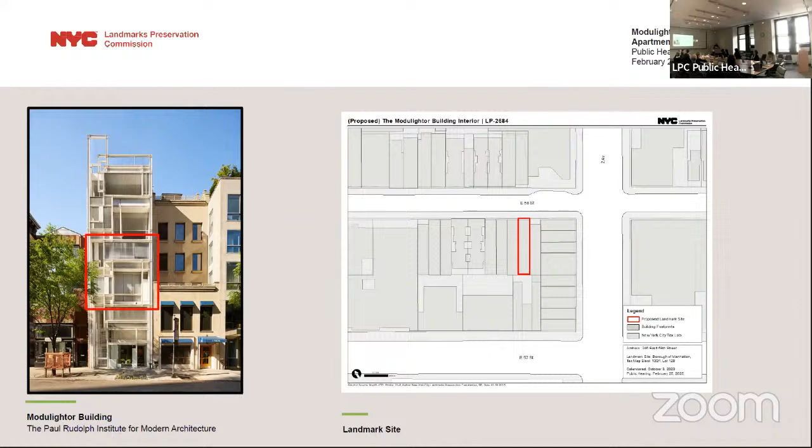The Modulightor Building's apartment duplex is an important late 20th century modern interior by the American architect Paul Rudolph. Located in Midtown Manhattan on the south side of East 58th Street near 3rd Avenue, the apartment duplex occupies the 3rd and 4th floor of the building, which was designated an individual landmark in 2023. The proposed interior landmark includes the entire 3rd and 4th floors, outlined in red, including the entrance hall, the north and south living rooms, 4 bedrooms, balconies, kitchen, and bathrooms.

The Modulightor Building was constructed in phases, starting in 1993. Planned as twin rental apartments, the apartment duplex received a temporary certificate of occupancy in June 1994. These units were first leased to tenants in 1996. Following Rudolph's death in 1997 and the settling of his estate in 2001, his partner, Ernst Wagner, moved into the building, removing a wall to combine the north and south units into a single apartment that also functioned as headquarters of the newly established Paul Rudolph Foundation. Following a 'disagreement over the group's priorities,' he founded the Paul Rudolph Heritage Foundation in 2014, which changed its name to the Paul Rudolph Institute for Modern Architecture in 2022.

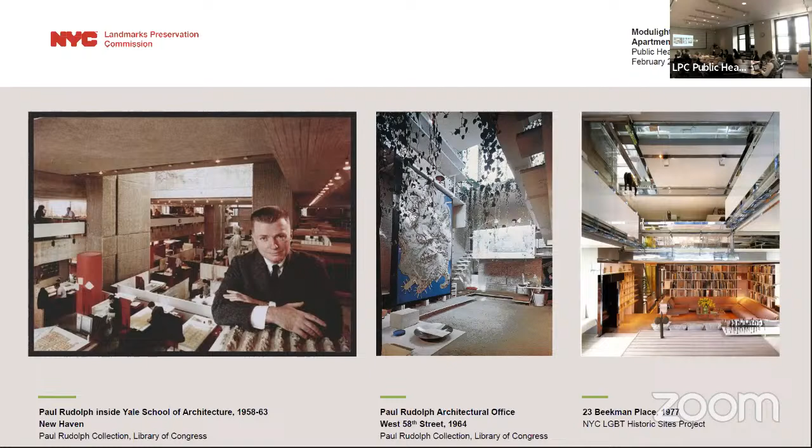The all-white apartment duplex has a fragmented open plan divided by partial walls and partitions. Significant architectural features include the tile floors, 2 staircases, exposed metalwork, fireplaces, lighting fixtures, and built-in furniture.

In a 2004 article titled 'An Architect's Last Word,' architect Joseph Giovannini wrote in the New York Times, 'Inside and out, the triumph of the design is that Rudolph pulled off the kaleidoscopic complexity with wallboard and off-the-rack metal studs and joists. For Rudolph, the richness of the materials didn't matter. He aimed at the same spatial qualities regardless of materials. It was space itself, Rudolphian space, that counted.'

Traversed by floating open stairs that rise and turn, as well as cantilevered balconies and landings that project over the lower floor, New York Times critic Jason Farago wrote in 2018 that these elegant interlocking spaces provide a corrective to the view of Rudolph as a brutalist heavyweight.

A highly significant late work by Paul Rudolph, the Modulightor Building Apartment Duplex is home to the Paul Rudolph Institute for Modern Architecture. Open to the public by appointment and through regularly scheduled open houses, this extraordinary space is the only publicly accessible interior by the architect in New York City.

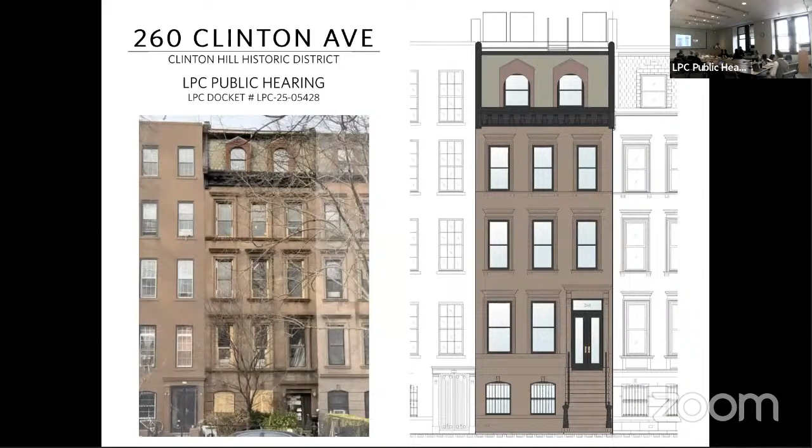They are owned by St. Joseph's College, so they're institutionally owned. These are all the tax lot photos of the subject building and its neighbors, showing the original state of the buildings with curved entrance doors and pediments, full height first floor windows, and wide stoops with substantial balusters and newel posts.

I would like to note that on all of these, the pediment originally crossed the lot lines between the neighbors. This also illustrates the original steps up from the sidewalk, which has been changed as evidenced on the next 2 slides. It's very important to our presentation that the areas here were raised originally, and you'll see that they are all lowered now to grade. So that's very important to what we are presenting.

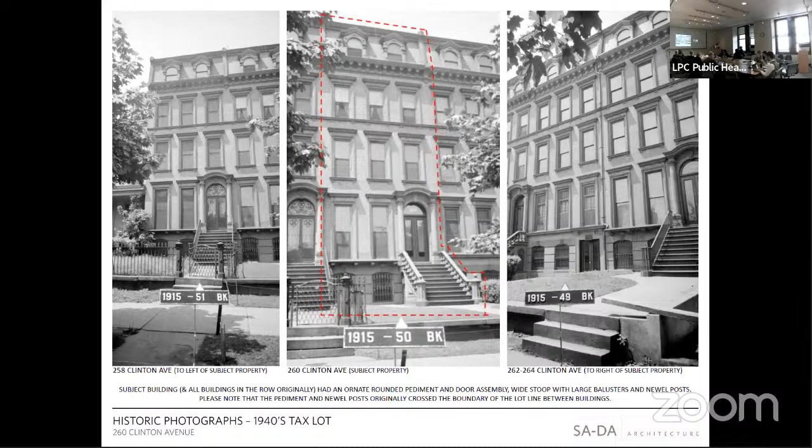Zooming in on these 4 buildings and their current state, the stoops have all been removed and the facades have markedly changed. The changes to the middle 2 buildings are centered on the first floor and below, while the building at the left has been substantially altered, and the one at the far right has also been altered with an Art Deco entrance.

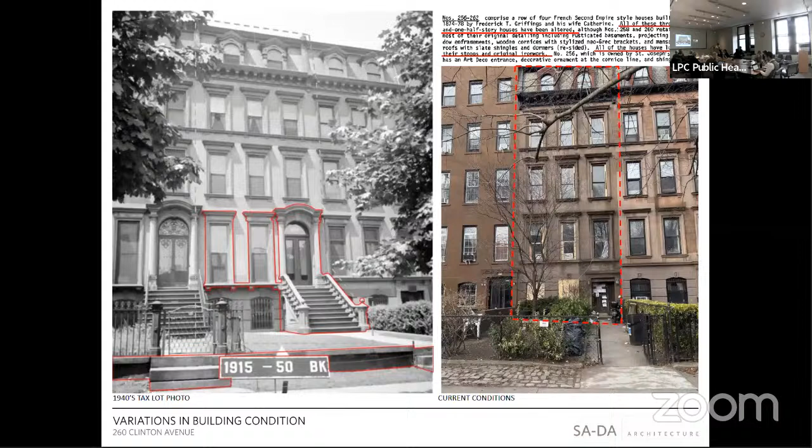Zooming in farther to focus on the changes in our specific building: the removed stoop and railings, the removed entry door and pediment surround, the first floor windows that had been raised previously, and the grade that had been lowered so there's much less grade now. What remains is a building that is very simplified and more rectilinear than what existed previously.

A 2D elevational drawing of the existing conditions, and a 2D elevation drawing showing our proposed design. We believe our proposed altered version is a more appropriate recreation than an exact replica of the original stoop and door location.

First, the grade has been lowered, which would mean the stoop would have to be significantly taller than the original stoop, which we believe would cause it to be out of scale if we were to replicate the original. An exact recreation of the stoop would be impossible for the pediment because the original one crossed the lot line, and we can't do that today. Any recreation would have to be cut off or altered in a way that would negatively affect its appearance.

Most of the curvilinear aspects of the original facade are now gone. We believe a more rectilinear approach fits better with the current row as they exist today. Likewise, as much of the original detail has been removed from these and the surrounding buildings, we believe a simplified yet still ornate building railing would be more appropriate at this stage than the altered version of the original design.

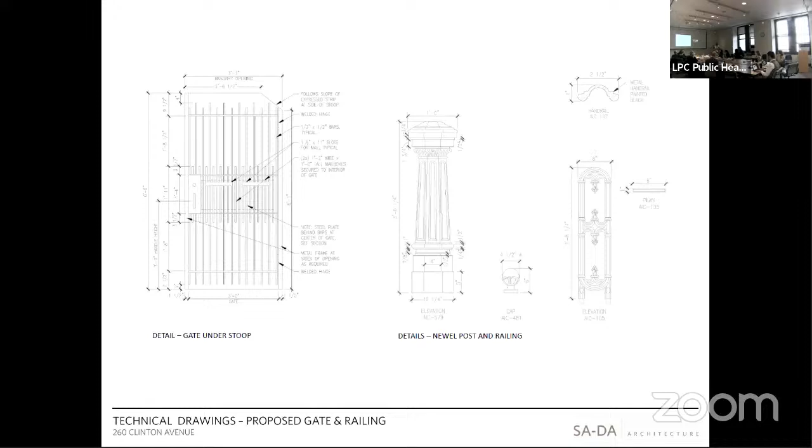Technical drawings of the newel post, railing, balusters, and understoop gate. Technical drawings of the proposed door, surround, and pediment.

Precedent: we have 4 precedents. The first precedent is within our historic district, though quite far from it. As you can see, it's on the lower right as opposed to our building on the upper left. This focuses on the door surround and the pediment.

The rectilinear nature of the door surround is what we are pointing out here. The railing is also similar to what we are proposing within the same historic district.

Precedent number 2 is also rather far away, but within the same historic district, as opposed to ours. In this example, we are focusing on the railing and newel post, where you can see that the detailing and the newel post are very similar to what we are proposing.

Precedent number 3 is not in our historic district, but it is closer - it's in Fort Greene, next to Fort Greene Park, right there on Washington Park. We are focusing on the railing and the newel post. This is a blow up of it.

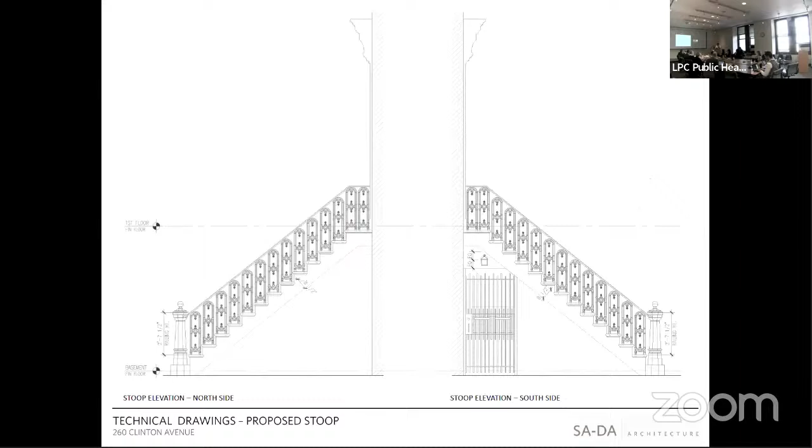I can go back to that slide if you prefer. Sorry. It looks pretty similar, right? You don't have much space between the doors with that.

But I can tell you that this newel post, as it curved at the bottom, did go over the property line. I'm fairly certain. It's hard to tell, but I'm fairly certain of that. It's very much more grand than what we are proposing. I do know that, but I think it would even be more grand given the additional 3 risers that we would need.

Okay, and I'm sorry if I missed this, I just wanted to catch your explanation because the biggest alteration is the flat arch at the entry as opposed to the historic arch, the round one. And what was your reasoning behind that?

Our reasoning, I wouldn't call it - I would just call it a design reasoning, let's call it that - because I believe if we were to do a large rounded opening, a rounded pediment, it would stand out even more on this row, and the row has been rectified. I mean, there is no more rounded anywhere.

And I'm concerned, honestly, that since the right two buildings are in institutional hands and the left building is not going to change anytime soon, we're not trying to set a precedent for these buildings on the right and left to follow. I mean, ideally, yes, but most likely it's not going to be a precedent. I don't want this to stand out too much. I don't want this to look out of place.

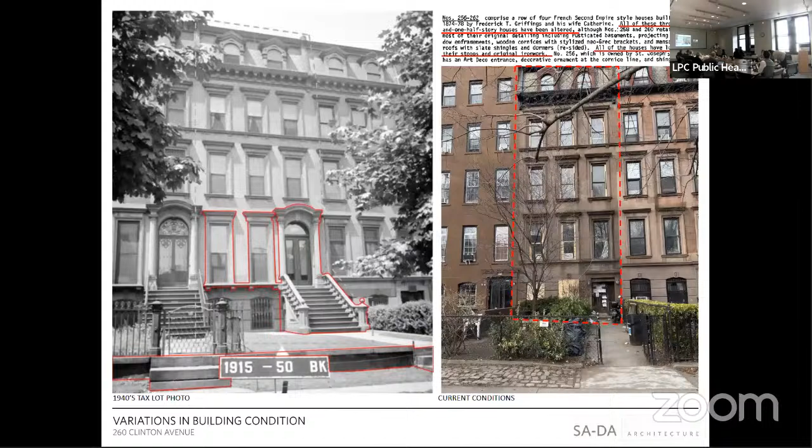So you've got a wood frame building right here, our building is right there. You've got a wood frame, you've got a Queen Anne, and I don't believe there are any more brownstones. They're all different on this side. This side is Dillon Children's Center, and then there's an incredibly beautiful big one-family on the side, and then St. Joseph's Library. So it's very different. And the other side are all the old Pratt buildings, the big mansions.

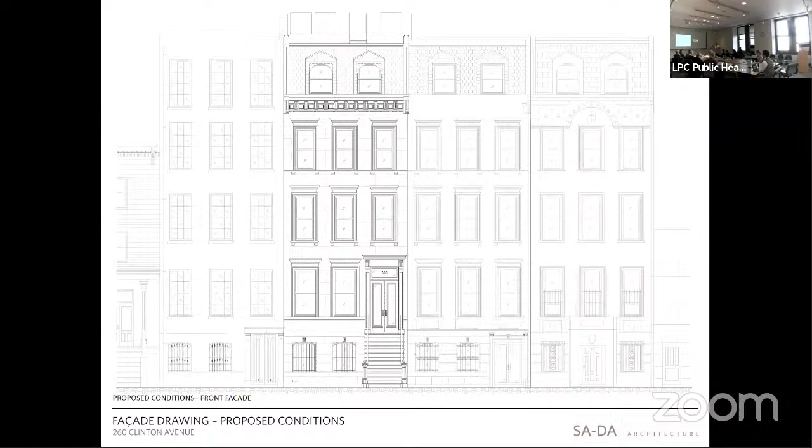It's a very good question. I don't know if I have that information, but obviously, we don't know actually when they were built. I would say they were all built in the same era. Okay, I can't tell you exactly. Right, they would be late 19th century, so within that sort of period, the lighter handrails, or something that came later. Well, that's the intervention, the alteration that we are proposing, is the lighter handrails as the main issue. But these handrails are original to this type of building. To those buildings, it's original, yeah.

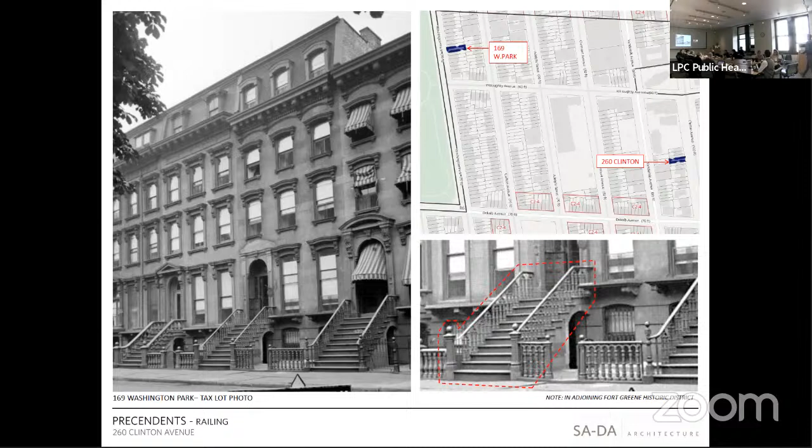Hi, can you hear me? Yes, we can hear you. My name is Rosaria Sinisi, and I represent Citizens for Responsible Neighborhood Planning of Clinton Hill and Fort Greene, which is involved in historic preservation matters in both districts.

We are always happy to see the restoration of original stoops, and this revised proposal improves on the ones submitted originally to Community Board 2's Land Use Committee. However, we feel there is room for further improvement in two areas. The proposal shows a much narrower stoop than that shown in the original tax photo. While we understand the lot line issues, the new stoop handrails proposed terminate into pilasters on each side of the door at its top.

But the photos offered as comparables, which are also for the most part French Second Empire, show those handrails terminating outside the pilaster elements that support their respective stoop pediments. If the new stoop must lose the dramatic width and flare of the original, adding a few inches to the stoop width and moving these handrails outwards so that they terminate outside the proposed pilasters, as shown in the comparables offered, would give a visual impression of a wider stoop without crossing the property line necessarily, particularly with an altered arch pediment at the top and possibly at the bottom of the stoop, where in most properties similar to these, it's only the bottom stair, the bottom brownstone stair, that actually turns slightly across the property line for a couple of inches. And you see that as a standard all the way up and down brownstone blocks.

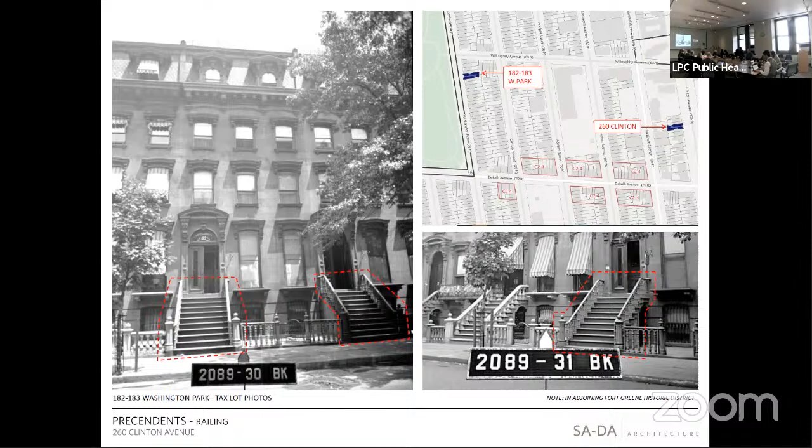I think what she was suggesting is that the railing be pushed to the other side of the pilaster without widening the steps, so that it's just to the outside edge of the steps. It would change how the railing meets the newel post. Okay.

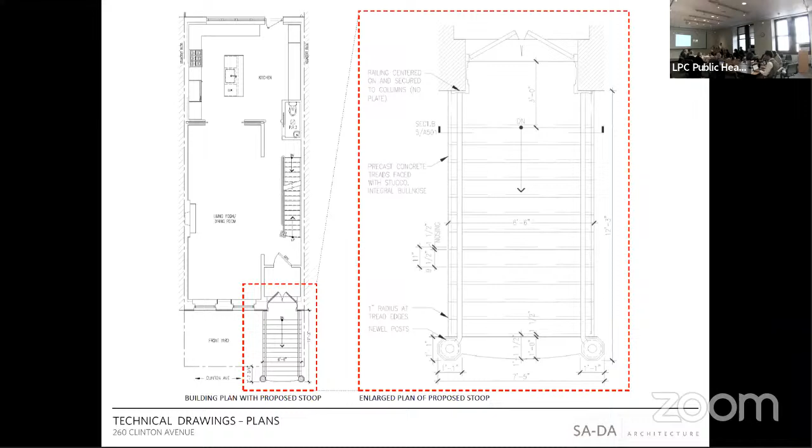This is a row of 4 buildings in a very eclectic block with a lot of diverse building types. Each of the four buildings has been altered significantly with the removal of their stoops and the removal of some level of ornament. This proposal is to restore a stoop, and the grade has been lowered at the front areaways. Proposal is for a new stoop that would address the height change, the change in grade, and a new door with a new door surround. And it looks toward more transitional details to fit within the current context.

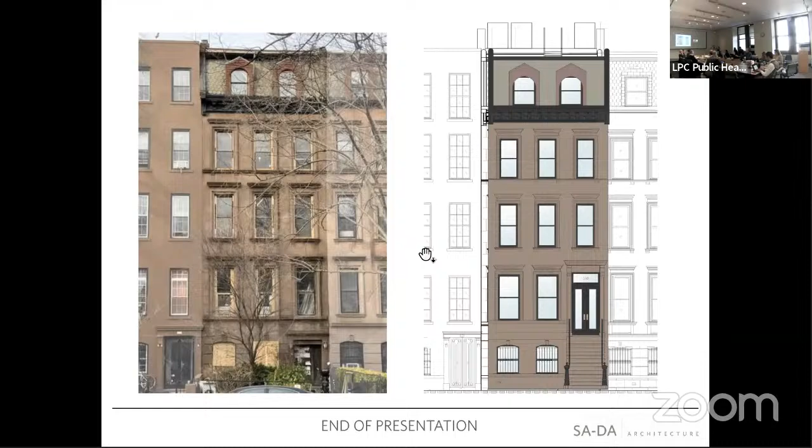All right, that's approved, and please continue to work with the staff on those details. We'll move to the next item.

Okay, I'm going to note a schedule change. We're going to read into the record the next item, item number 2, LPC 25-07011, 348 MacDonough Street in the Stuyvesant Heights Historic District, not to be presented today. We'll read it into the record to be presented at a future hearing date.

That will take us to public hearing item number 3, LPC 25-04579, an application for a certificate of appropriateness in the Borough of Brooklyn, block 1074, lot 40, 186 8th Avenue in the Park Slope Historic District. This is a French Renaissance style row house built in 1897 to 98. The application is to construct a rear yard addition.

Wait, you can say that.

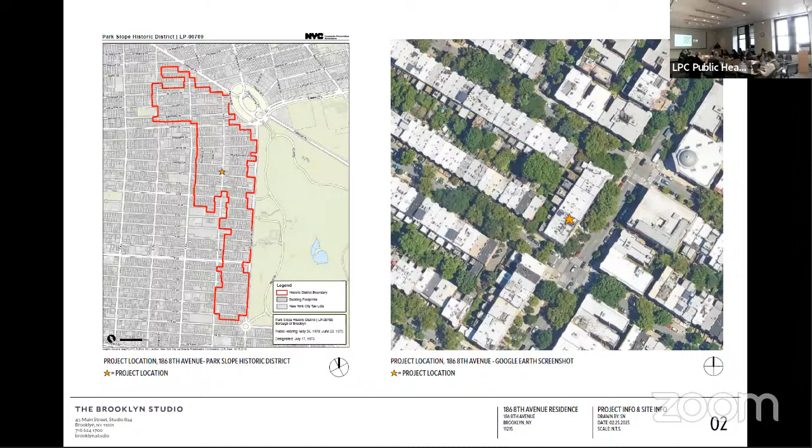This is the gist of the application. The drawing on the left is the existing condition, the drawing on the right is the proposed alteration. This row of three houses, the one on the corner of the block is right there on the right side. That building has had multiple additions over the years. It started out taller in its extension, then got converted to an apartment building at some point, so it got fully filled out. The house directly to the right of our project, we believe, got a first floor rear yard extension around 2020. Our proposal is to add a two-story rear yard extension in the same space.

This is a little axonometric describing the existing condition. The red building to the left is one of a row of, I think, four of pretty much identical configuration, with large rear yard extensions, larger than what's existing in our three buildings. You can really see the funny accretions that have occurred to our row, the corner building being the most involved. You can see the corner building was initially 3 stories tall with a 2-story portion, and then the third story was eventually filled in, we think around the late 1930s.

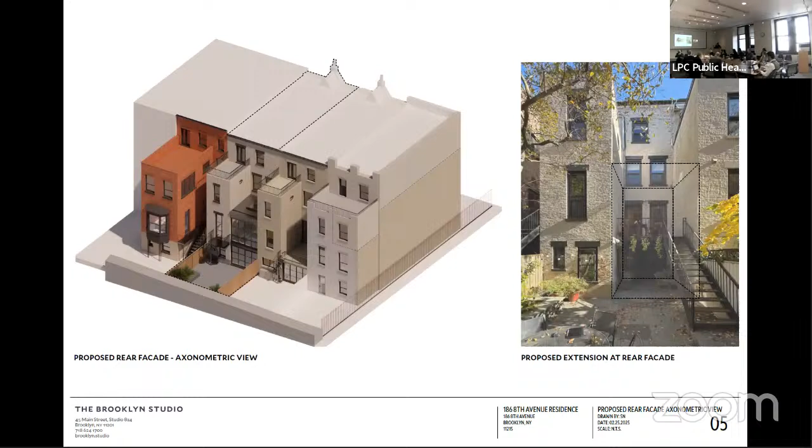There's high visibility here from First Street. Again, you can see our building is the white one, 3 over. You can tell which one it is because it's next to the red brick extension. You can see there is visibility of the second floor extension. There it is.

And there's the rendering of the proposed extension. We've designed it to be set back 8 inches from the masonry facade, so that it's clearly subservient. It's a wood and glass extension with an iron rail, really rather simple, meant to allow the original form of the building to continue to read.

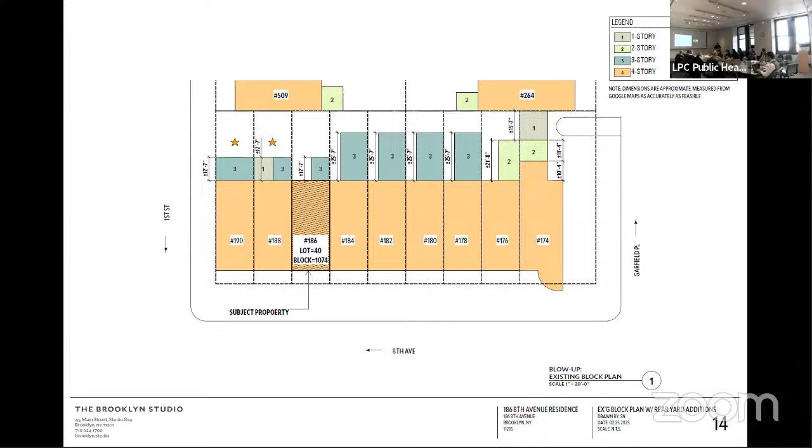Before and after, 2-story. Existing plans, proposed plans.

This is our color study of the extension. The buildings are all painted white brick, they appear to have always been painted white brick, and we are not changing any of that. We are just filling in our two-story extension with our wood and glass structure, and then a steel spiral stair down to the backyard. The house already has its lintels and sills painted black, so we're continuing that detail in this facade.

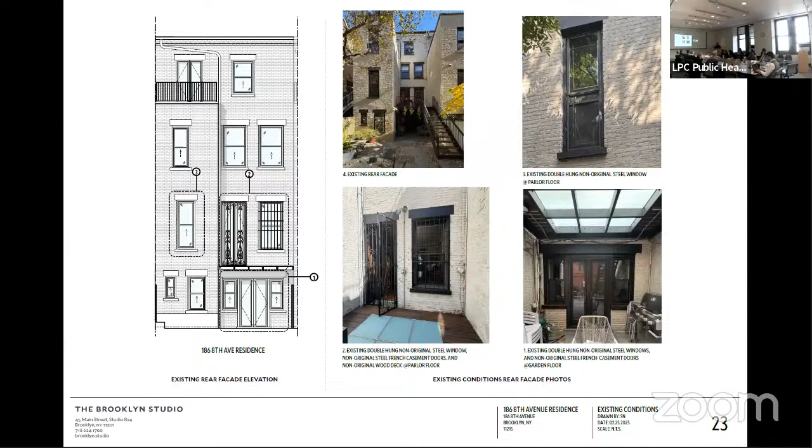Existing, proposed. Just some existing condition photos of what's going on. There's a deck there currently. Plans.

Existing, proposed, I think that's it, right? One more. Oh, that's the final image. So that's it. All right, great. Thank you. Okay, any questions, commissioners?

Yes, Commissioner Chu. So the addition, you said it's wood and glass? Well, the door system is wood, and then the frieze and fascia and the panels are wood, and then there's a steel handrail and a little spiral stair down to the garden.

Okay. And it's hard to tell from the drawings, but the detail of the roof eave has some kind of profile to it. Yeah. So it's like it has a section. What's that? Yeah.

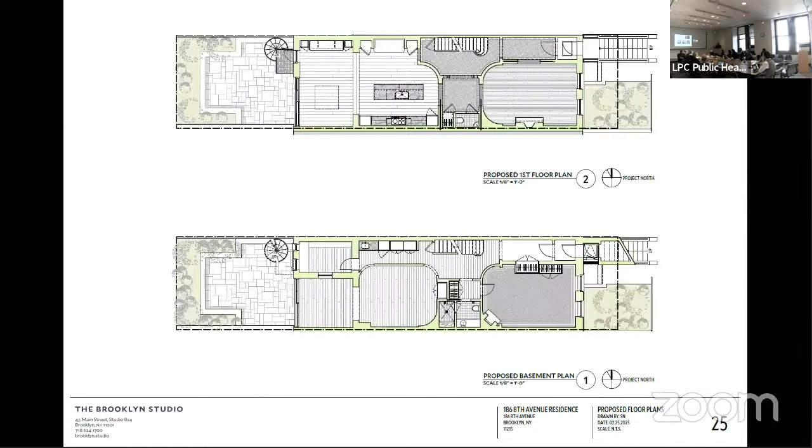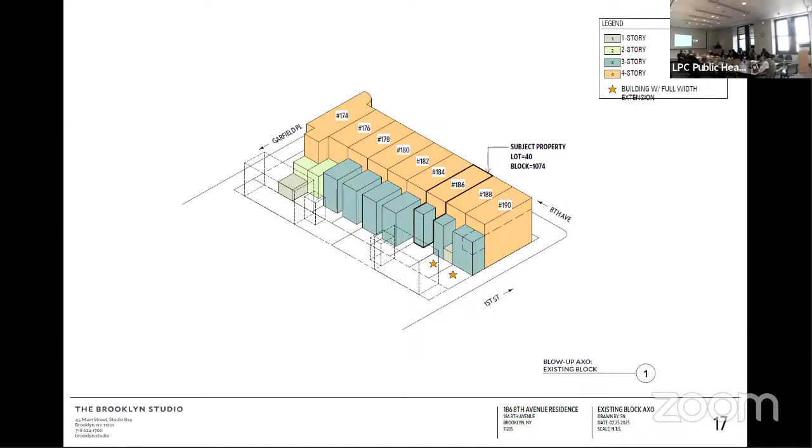It'll be the last one. Okay. Do we have it? Number 12. Okay.

Yeah, so there is a frieze and then a fascia popping out. We're actually doing a Yankee gutter for the roof, so that nothing drips on the facade, and all the water comes back. The roof is a metal roof, but that element does not extend beyond the face of the masonry.

It's hard to tell, it looks like it could extend slightly, but it could easily come back. It could. Okay.

Would you call that detail, the look and profile, more contemporary, or? No, I think we were trying to break up a large forehead, in order to get the structure in there and then accommodate a skylight in the space. We also have an HVAC system tucked into that roof assembly.

We had a bigger chunk of roof, and so visually, I wanted to just break it down by adding some shadow lines to it. Okay, so it's not feeling too modern to me. No, I'm not saying that's a negative thing at all. I'm just trying to get a sense of the aesthetic, because I consider it an infill piece.

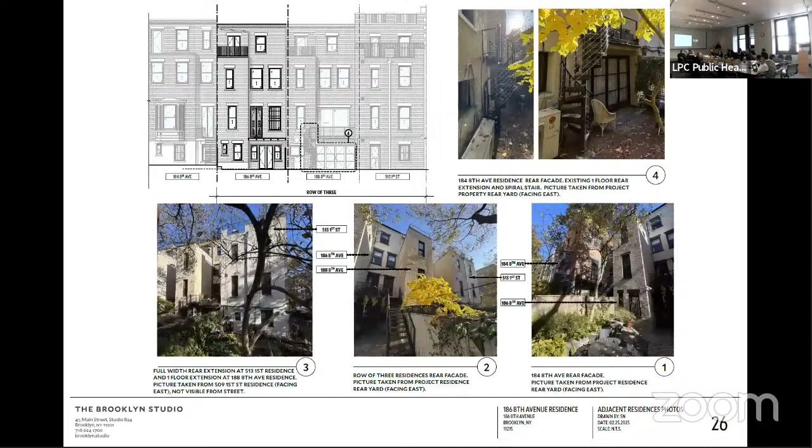Okay, other questions? All right. I don't think there are any other questions at this time. So we'll see if we have public testimony. Is there anyone in the room who would like to speak on this item? Noting that there isn't, I'll turn it over to Stephen Thompson to see if we have any remote participants. If anyone joining us via Zoom would like to offer testimony, please use the raise hand function. Christina Britton Conroy, I will be elevating you to panelist, after which we ask you to unmute yourself, state your name for the record, and you will have 3 minutes to speak.

Good morning, Commissioners. I'm Christina Conroy for the Victorian Society, New York. Founded in New York City in 1966, the Victorian Society in America is dedicated to fostering the appreciation and preservation of our 19th and early 20th century heritage. The New York chapter promotes preservation of our historic districts, individual and scenic landmarks, interiors, and civic art. Now, the VSNY does not support this proposal for a rear yard addition as it now stands.

The rear facades of this building and its neighbors in the row are predominantly brick with punched window openings. The rear facade of the proposed addition is predominantly glass. The applicant's photomontages show that the addition's upper level at the parlor floor would be clearly visible from First Street. We do support the removal of the existing windows and sections of the rear facade. The masonry is minimally detailed, and most of this work is hidden from view by the rear wings of the neighboring buildings.

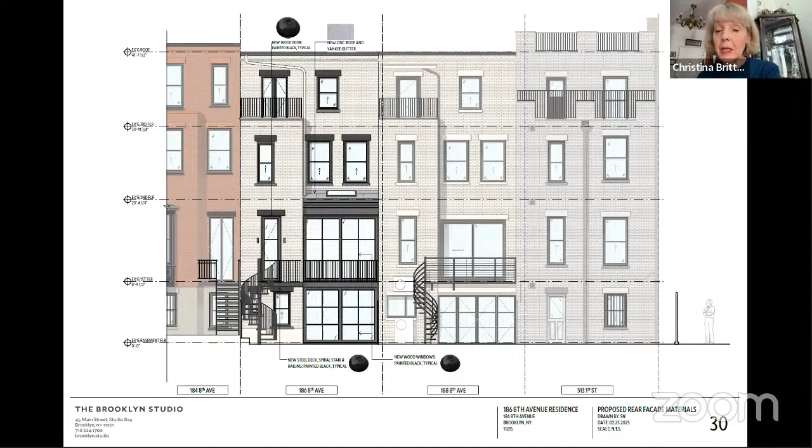But the new infill at the parlor floor is overwhelmingly glassy. It will draw undue attention to itself. It bears no relationship to these historic masonry facades. The cladding on the visible upper floors should be predominantly masonry with a punched window opening. Thank you, Commissioners.

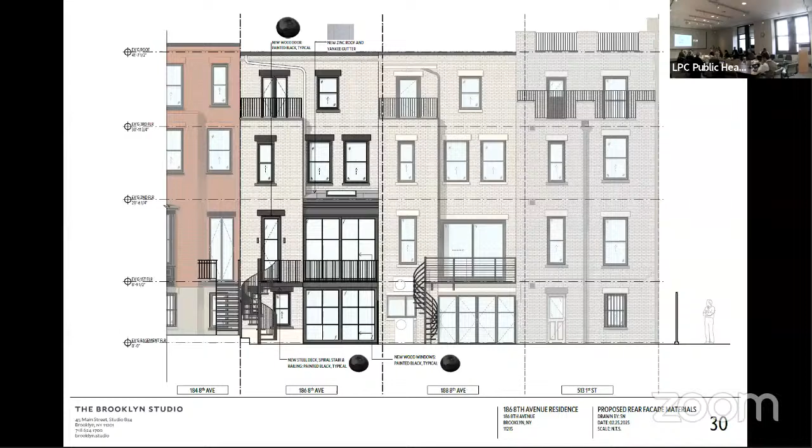This is for an application for a two-story addition that is nestled in between two L's and expressed in a wood and glass material to allow a continual reading of those L's. It doesn't project out any more deeply than the existing L's. This context has shown much deeper additions, and it does have visibility from the side street, looking through the gardens, where you see the second floor. Commissioner Jefferson, would you like to start this one?

Two-story building, and the addition of the material wood, and the color of the wood, is appropriate. It's really a very thoughtful, careful design.

Thank you, it's appropriate. Commissioner Ginsburg? I agree, I also think it is good it is not masonry, because it keeps with the design and shows what's more original. I think it's appropriate.

Commissioner Chen? And just to follow up on that, the key word is what you just used, nestle. I think in this case we had an option. If you used masonry, you would make it look much more massive. I think this is clearly a delineation of a new addition.

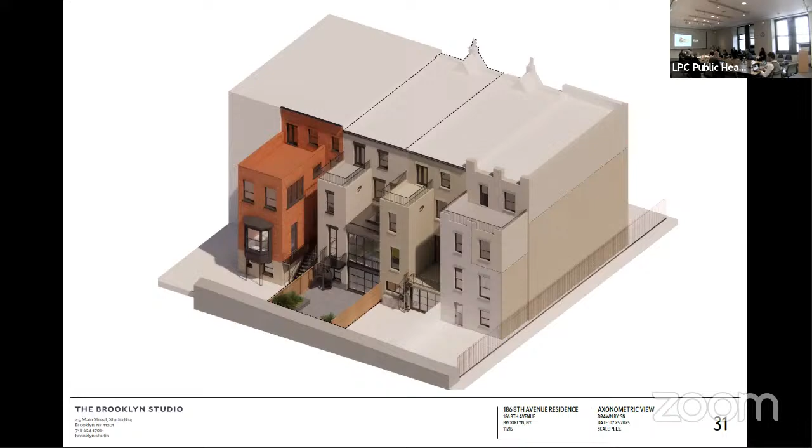We'll move to the next item. Next item is public hearing item number 4: 92 Prospect Place, Park Slope Historic District Extension 2, LPC-25-04172. It's an application for a certificate of appropriateness in the Borough of Brooklyn, block 939, lot 7503. This is an Italianate style row house, and the application is to construct a rear yard addition.

Hello, good morning, Commissioners. My name is Gilles Depardon, I'm from Ogawa Depardon Architects. I represent Elizabeth Pagano, who is our client and who owns the 2 bottom levels of 92 Prospect Place.

Which button am I pushing? Sorry. Up and down, I see. Okay.

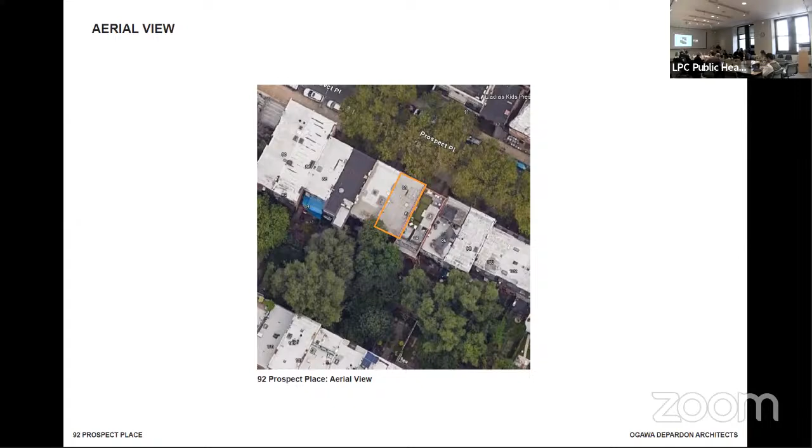Above is the existing building. You can see from this photograph there's an addition next to us which is a full height addition. I believe the landmark designation actually stops right on our property, on the west side of our property, shown here in this photograph. So a lot of the buildings to the west of us are actually not landmarked and are very modern looking. East of us, there are quite a few additions as well, which I'll show you in a second.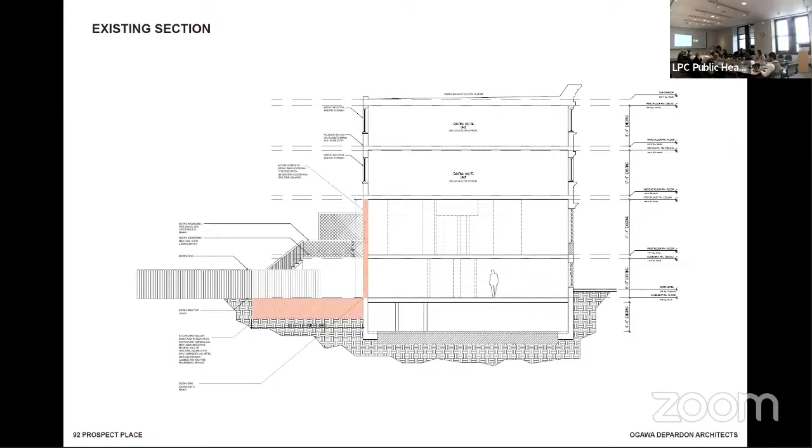Sections: existing section, and a proposed section. So we're basically going to do 2 stories. The roof is not accessible from the 3rd floor. It will be a green roof, dedicated by the building department at this point. And then we have a 7-foot deck extending into the rear yard as well.

This is the extent of what we are demolishing in the back, and that actually matches from window to window. So it's really just replacing that center brick section that's in pink here.

And this is our proposed addition, with a bit of pictures right there. They're all Pella windows. What you're looking at is a cut through the deck, so you're not seeing the actual facades, just the bottom, which are 2 big doors leading to a slightly lowered garden area and then a deck above.

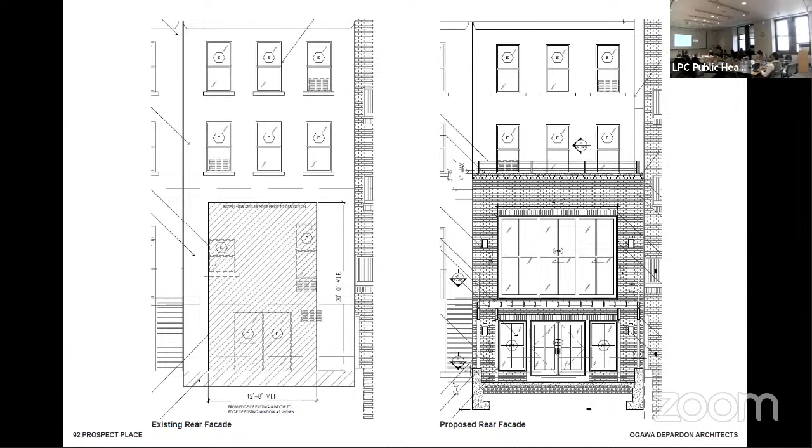This is the brick we're proposing for the back, which actually matches the brick on the building next door. And the window on the left is just showing the windows that we're proposing.

Any questions on this one? Just, can you tell us how deep the rear yard addition is? 15 feet. 15 feet, okay.

Commissioner Chu: And what's the neighboring building on the right, in terms of the depth? Yeah, I think 13 feet. 13 feet. And what is the finish of the existing facade above the two floors? Are you redoing that? We're not touching that. You're not touching all of it? It's going to remain stucco and painted.

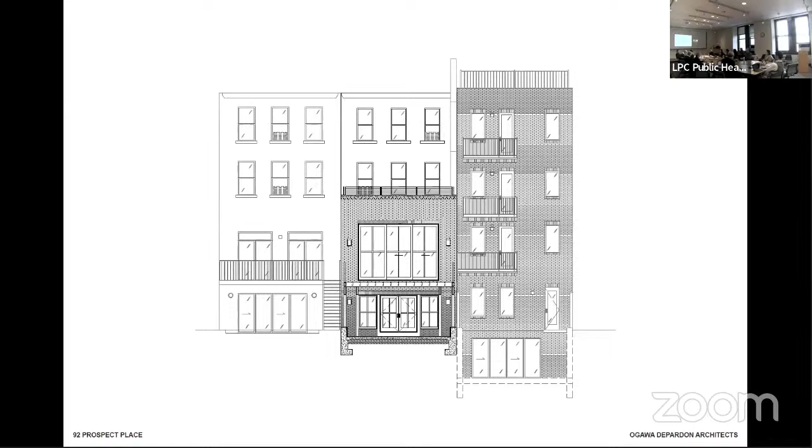Okay, you're using zoning as a criteria. Yeah. I'm talking about in terms of your neighbors, how do you decide? Do you want to go to the block plan that shows the context? Sure, yes. You have a very clear block plan that's color coded and dimensioned. There you go. So there are quite a few additions that are deeper than ours. You can sort of see on this plan, and there's some we haven't measured which couldn't verify the actual dimensions, but there's a lot of buildings on this block that are actually much deeper than our proposed addition.

Is the building next to yours an addition in brick, if you're showing us the picture? The brick is actually the facade on the front of the building, 2 doors down from us. No, but on the rear.

On the rear facade, let me go back to the pictures. That looked like a newer facade on the rear. Yes, on the right that's correct. It looks like the same brick that we're proposing. Is it an addition? This is a full new addition, full height addition.

Okay, but you didn't show it on your block plan. Yes, it is, it's there. It's not shown as an addition. I don't see it as an addition on your lot. Oh, I'm sorry. It's a full, so let me show you on this facade right here.

On the left photograph, you can see the building was completely redone top to bottom, a rebuild altogether. It's a rebuild and maybe deeper than it was. And it was deeper originally, correct, right.

Yes, Commissioner Lutfi, question. So the truth of the matter is, could we go back to the plan showing the rear and the extensions? In fact, the truth of the matter is there aren't a lot of extensions.

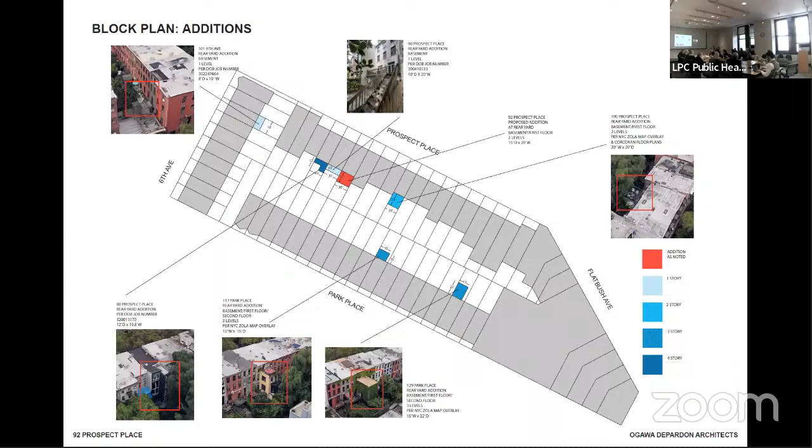Next item is public hearing item number 5, LPC 25-04975, an application for a Certificate of Appropriateness in the Borough of Brooklyn, Block 945, Lot 40, 28 7th Avenue in the Park Slope Historic District. This is an empty lot, formerly a transitional French Second Empire neo-Greek style row house built in 1873 and demolished in 2023. The application is to construct a new building.

Sarah, if I could provide some background about why there's an empty lot here before the presentation. Please go ahead. At 28 7th Avenue, there was a demolition-by-neglect building. We began enforcement actions about a decade ago, issuing a warning letter, a summons, a chair's order. We never had any response from the owner.

The foreclosure was granted about 3 or 4 years ago. The new owner then took over the property, contacted us right away, hired a structural engineer who made a site visit, prepared an existing conditions report, and filed a plan to stabilize the building with us. A staff permit was issued in 2023 to stabilize the building.

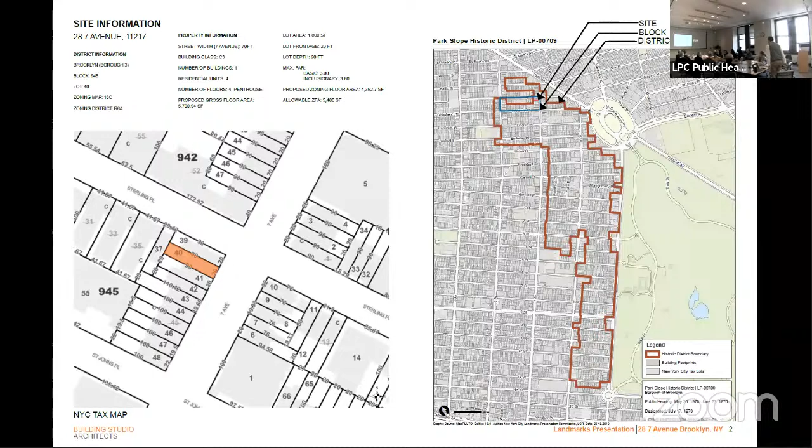This is 28 7th Avenue, a vacant parcel in the Park Slope Historic District on the west side of 7th Avenue near Sterling Place. The block on the west side is uniform in scale, with a strength and uniformity to the fenestration and cornices. On the east, the facades are more fragmented, with the Grace United Methodist Church anchoring the corner at St. John's Place. This site was part of a row of 5 dwellings built in 1873 that represented the introduction of the neo-Greek style in Park Slope.

The existing remaining buildings at 30, 32, and 34 retain ornamental treatment of the doorways, roof cornices, and smaller details, such as the corbel blocks under the windows and faceted keystones at the basement windows and original stoops. Our site at 28 tragically fell victim to demolition by neglect and is now vacant.

The building on the corner at 138 Sterling Place was demolished in 1960 as a result of the airplane catastrophe, which fragmented the neighborhood. This new corner building is a standalone masonry and terracotta multiple dwelling erected in the early aughts.

We are proposing a 4-story, 4-unit new building of approximately 4,360 zoning square feet of an allowable 5,400 square feet. Our intent is to maintain the strength of the fenestration patterns and detailing from our historic neighbors, resolving the at-grade accessible entrance with pediment detailing borrowed from the historic stoop pediments of our neighbors.

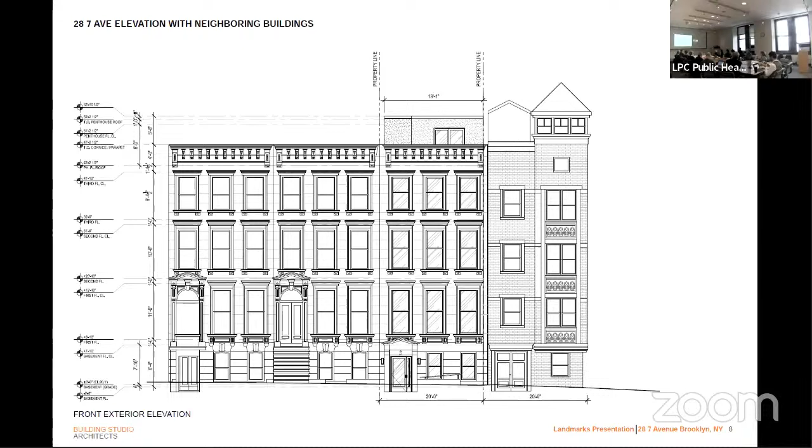On the roof, there is a penthouse setback with very limited visibility. The cornice serves as a parapet at the street wall.

We did not seize on the opportunity for a new modern building on this parcel in order to reduce the cacophony possible from the dialogue between the aesthetics to the north and our history to the south. The proposed detailing of color-matched stucco, replicated ornamentation, and cornice and scale of fenestration quiets the block front.

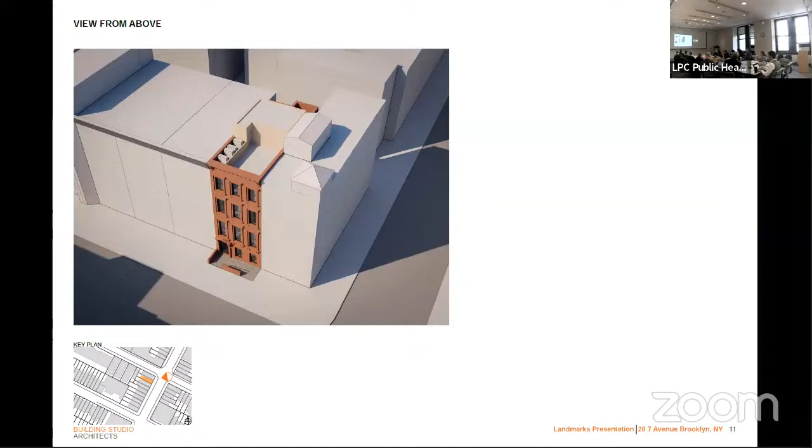From above, you can see the penthouse setback on our roof. We have no visibility from the north, from the Sterling corner. It's blocked by the tower of our corner building.

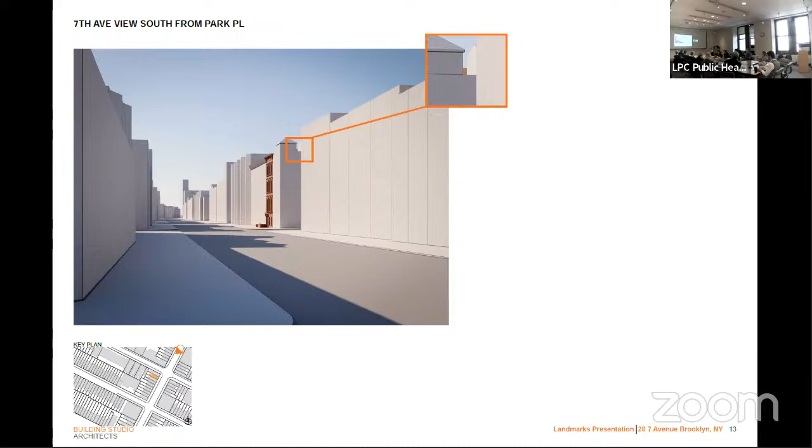Backing further up, looking south, there is a sliver of visibility between the bulkhead and that existing cornice, that existing tower on the corner. Looking north, again, the cornices shield visibility. Backing up further, they continue to do so.

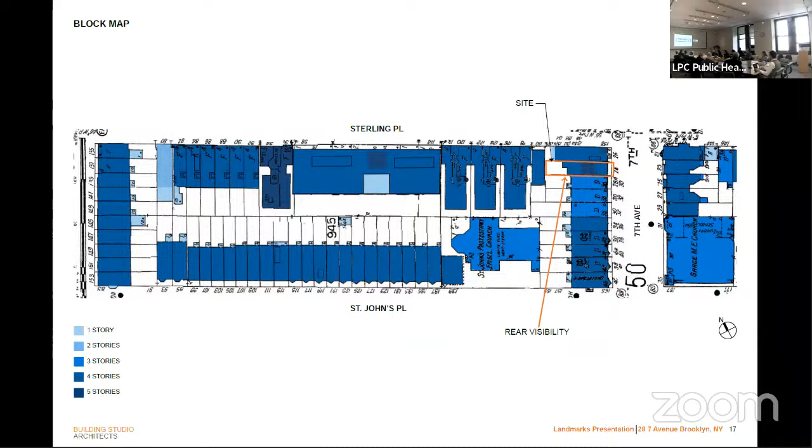From Sterling Place looking east, there is a very limited piece of visibility over the cornice rooftops. And from St. John's Place at the rear, we also have visibility across the yards of our neighboring buildings.

This is a little bit of a different condition. We have stepped the rear of our building back against the much taller corner blank brick wall of that adjacent building at 138 Sterling.

Here on the left, you can see the existing slot view. That is the brick wall you're looking at in the rear of 138 Sterling. And our proposed on the right, you can see the stepping of our rear facade.

The rear facade is brick. It's developed more modern. It's glass and black metal railing with balconies.

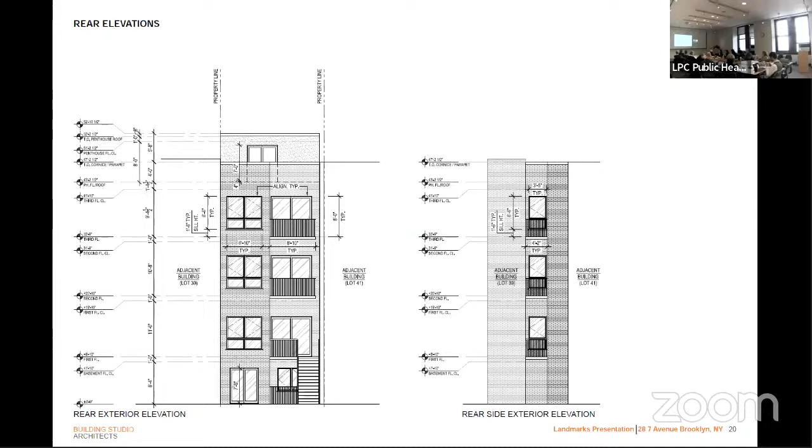Looking closer, zoomed in, you can see we've added windows on this stepping facade to take advantage of light to the south. And here we have the block front.

Taking you quickly through the plans, the basement floor and the cellar are a single unit. There's a rec room in the cellar. The first floor is a single unit with access to the rear yard. The second floor is a single unit. And the third floor with the penthouse is the fourth unit.

Our mechanical equipment is located on the roof of the third floor in front of the penthouse, shielded by the parapet.

Our detailing at the street includes ADA access, and that's all within the property line. We do have a wall proposed that's aligned with our neighboring walls and stoops. That's within the street line.

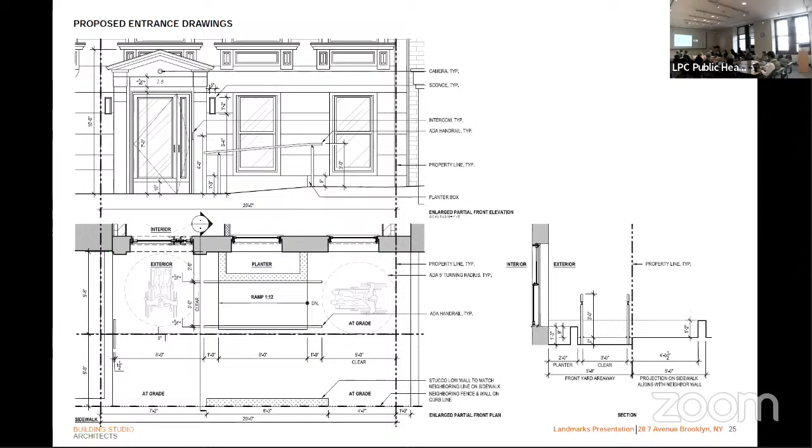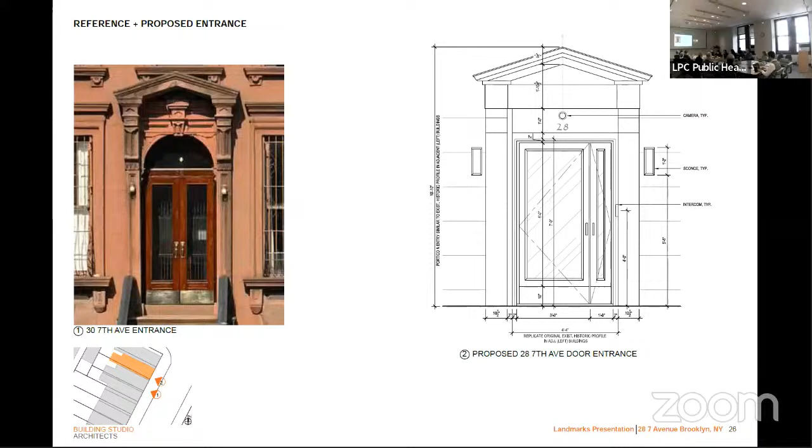The detailing for our entrance door is simplified, but was taken from the resolution of the existing pediments at the stoop and the window sills above.

We scanned the block with 3D scans, so we've developed the detailing of the stucco in conformance with the historic profiles. Our cornice above is again detailed per the original cornices. This will be constructed of wood.

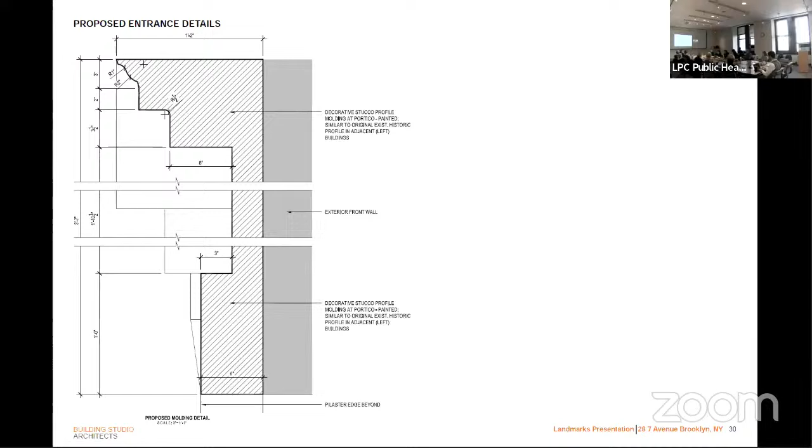In further, we have door and window details. We're proposing 2/2 clad wood windows and doors at the street facade. Here are the materials: stucco to match brownstone, common brick, and black metal railings.

I'll conclude and open for any questions. Thank you. Any questions, commissioners? Yes, Vice Chair Bland.

Talk to us a little bit more about the stucco. Is it ground with actual brownstone sand, or is it just stucco?

It texturally will be as close to the brownstone as we can get. It is not going to be a true brownstone. It has to be a color-matched stucco because they can't match the brownstone well. I'm not an expert, but my understanding is that you can put brownstone sand, if you will, aggregate, into the mix—it's an aggregate, but it's so small it's really like sand—into the stucco mix, so it really looks and feels like it.

I know across the street from where I live, and actually once lived at 43 Pierpont Street, it's been done like that, and it looks pretty darn good. It looks like brownstone, but it's a coating, and I'm asking this, drilling down on it, because I think it's a fine line between what could be appropriate here and what would not be appropriate. I respect that, and I will work with our clients, the owner developers, and staff in process to make sure we get a specification that they're confident with, particularly staff.

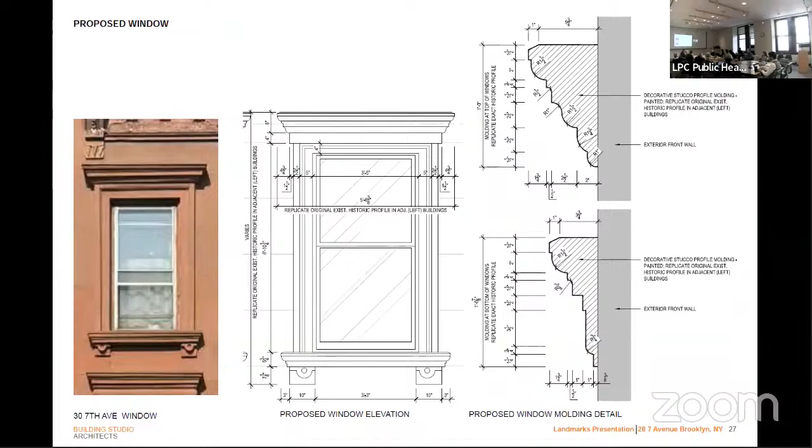Okay, Commissioner Chapin? Yeah, I wonder if any of the architects or staff have experience with the CMU with the stucco on it, and how that does.

I'm not really familiar with that, as I think one of the things that needs to be ensured — and I think Commissioner Bland mentioned the type of stucco — that's very important. From my experience, it definitely needs to be at least a 3-coat system, which tends to be thicker, with a little bit more layers and drying time. It takes longer than a very superficial stucco system on block.

But it makes a difference in appearance, and can also achieve a better grade of detail. Well, it potentially could do that, but I also think it has to do with the resilience and durability of the stucco system. It also has scoring in it that mimics blocks. The material makeup makes a difference too — if you have the brownstone material in the cementitious mix, which stucco typically is, it will emulate the real brownstone better in look and probably texture.

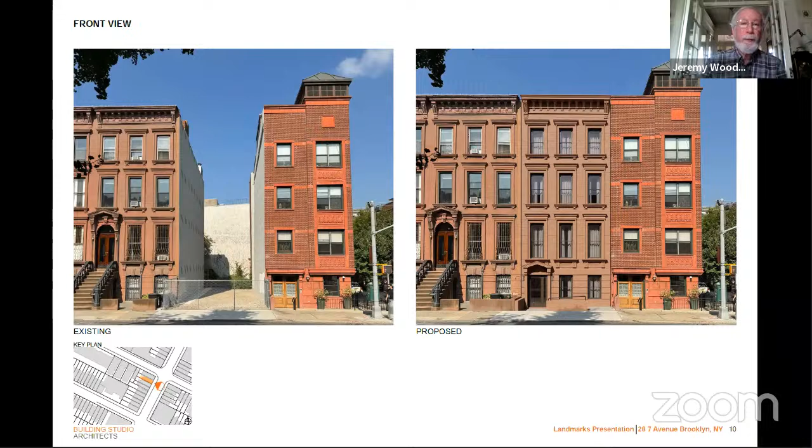Hi, Commissioners. My name is Lucy Levine. I'm speaking on behalf of the Historic Districts Council. 28 7th Avenue had been on HDC's Buildings at Risk list. We were sad to see the historic building on this site demolished in 2023, but we are glad that a new building will fill in the street wall here. We are doubly glad that the new building will offer multifamily housing.

We appreciate the need for an accessible grade-level entrance for this multifamily building. HDC strongly supports universal design and accessibility interventions on historic buildings and in historic districts.

Because this is a new building and the grade level entrance is an inherent and purposeful part of the design, HDC believes more consideration should be given to the design and detailing of the building's plinth level so that the ground floor entrance looks intentional rather than as if it were created by removing a stoop. The reason the grade level entrance currently looks like an alteration is that the rest of the building is designed to replicate the recently demolished historic building at 28 7th Avenue, which had a stoop.

HDC wonders if it is possible for this new building to accommodate an accessible entrance at grade and a stoop. If not, and the only entrance to the building will be at grade as proposed, then the ground floor entrance should be further articulated and the proposed material should be clarified. Thank you.

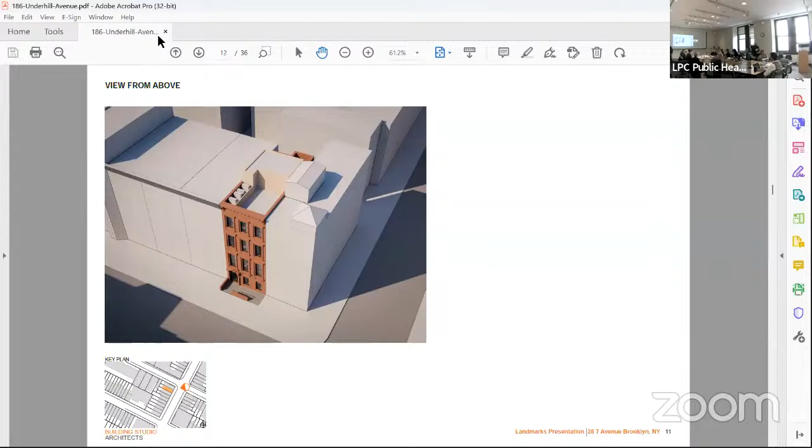Next item is public hearing item number 6, LPC 25-04543, an application for a certificate of appropriateness in the Borough of Brooklyn, block 1171, lot 56, 186 Underhill Avenue in the Prospect Heights Historic District. This is a Renaissance Revival style store and flats building built circa 1915. The application is to install signage.

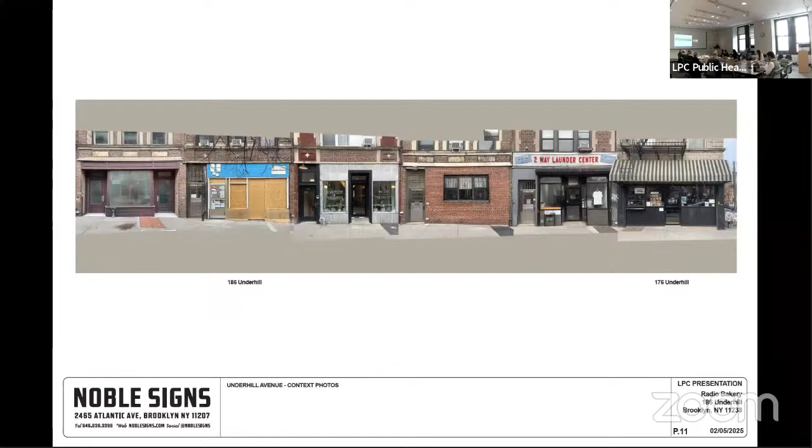Commissioner Chu: So the application is just for the signage, it's not the storefront? The storefront was passed at a staff level. Oh, okay. And they went through, I think, 5 revisions and got that all approved.

Really? Because the previous people had done something that was just so out of line that getting that lower block at the right height and stuff was a little fussy, and so they've done all that. That storefront is in, they put it in yesterday. We were lucky enough to have nice weather. Okay, they're imminent with opening.

So my other question is, in the elevation, if you can go to your elevation for a minute. You obviously position the signage over the glass glazed portion of the storefront below, but if you do that, isn't there like elements, detail, white bricks in there that will be partial, and then half of it is gonna be covered only?

That's why we had originally tried to propose going the full width and matching those columns rather than matching the storefront, because there's a diamond that will be interrupted at the edge. So what we were proposing originally is sort of 4 inches inset from the property lines, because there are those raised columns. But in our initial notes, we were given pushback against that. So we went to this approach, which matches the storefront width. It doesn't actually match the glass, it matches the metal glazing. So we came to the full width.

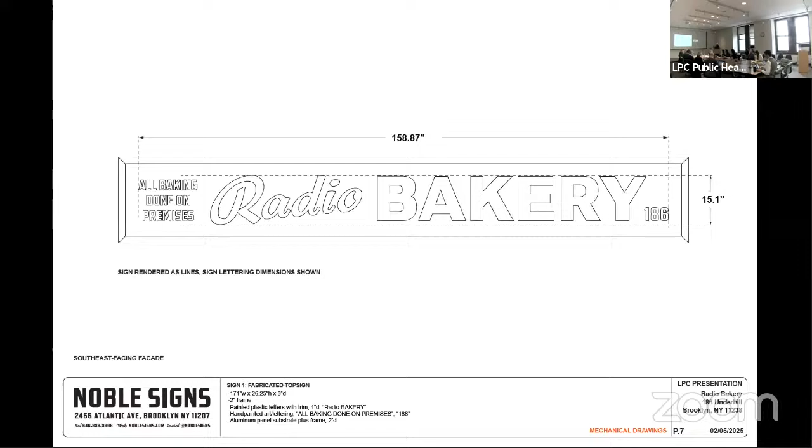Thank you, appreciate it. I wish most neighborhoods could use this type of detailing. As we came out of sign painting and sort of found our way into this business, we were a little shocked every step of the way to find out how the industry was running. When we go to sign conventions, there's very little for us there.

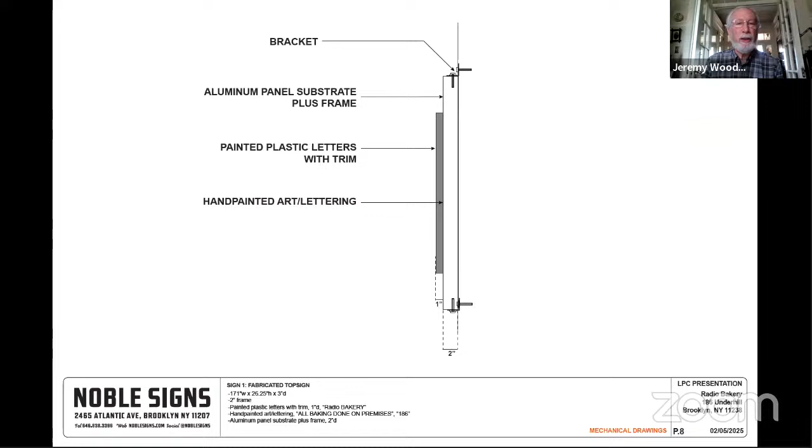The applicant provided 4 tax photos. We feel that the historic signs at 188 and 192 Underhill, which were centered on their facades, enhanced those facades. We believe this new sign should also be symmetrically placed on the building. Its placement should also respect the underlying masonry pattern and not leave random bits of it exposed. In that regard, we think the applicant's original proposal, provided the sign band remained at the current width, was actually far superior to what's now being proposed.

Some members of our committee questioned the use of a plastic sign here. Those great-looking historic signs were all either metal or painted wood. However, others felt the jaunty period design of the proposed sign is enhanced by the use of plastic. We look forward to hearing the commissioner's comments on this proposed material. Thank you.

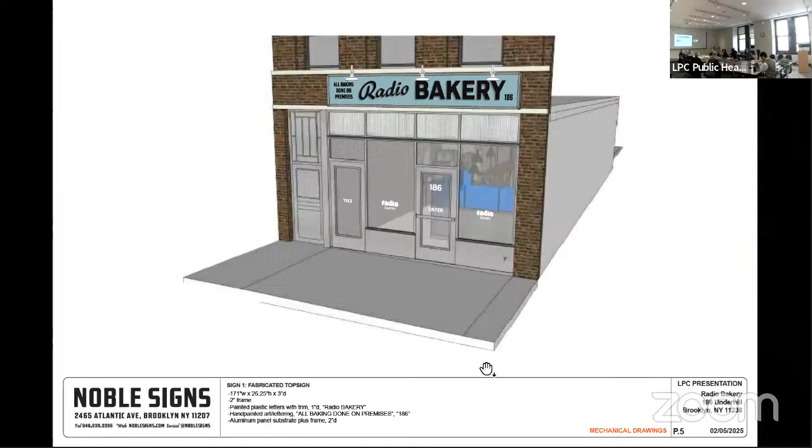Any other final questions? Okay, let's move to our discussion. Commissioner Chapin, would you make a motion to close the hearing? So moved. Thank you, Commissioner Chu. Would you second that motion? Second. All in favor, say aye. Aye. Any opposed?

So this is a proposal for a sign in a band that has some patterned brickwork above the storefront that was historically used as a sign band, and we've seen those historic photographs. They're proposing, as the current application is, a sign that aligns with the width of the storefront, but had originally sought approval for a wider sign, which was recommended in the testimony that went the full width of the building. The sign is painted metal with applied acrylic letters that have finished edges and a little bullnose detail.

So we'll begin our discussion. Commissioner Master, would you like to start this one? Sure. First, I want to commend the signage company for your hard work. It looks like you've done many iterations and that you've been very thoughtful about how you put this together, and we really appreciate that. At first, I was a little disturbed that this sign covered the brickwork, which to me seemed very important to the character of this building.

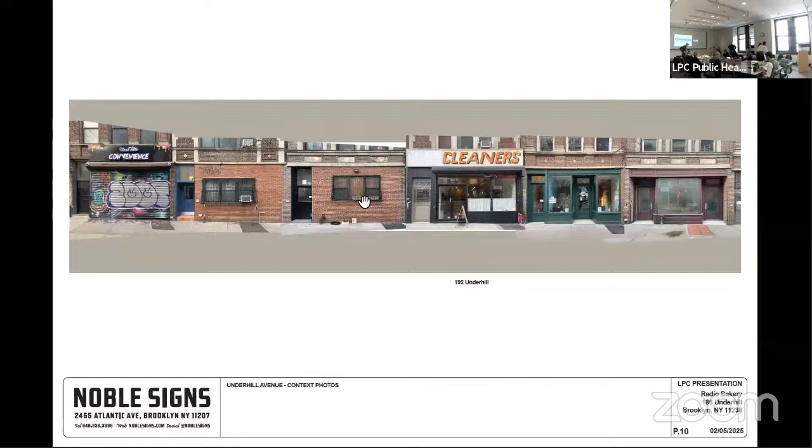Next item is public hearing item number 7, LPC 25-05485, an application for a certificate of appropriateness in the Borough of Brooklyn, block 1159, lot 88, 273 Park Place in the Prospect Heights Historic District. This is a Renaissance Revival, Romanesque Revival style row house designed by William H. Reynolds, built circa 1898. The application is to construct rooftop and rear yard additions, modify a bay window, and relocate a stained glass window.

Commissioners will note that our presenter is remote, so if you could please state your name for the record and then you may begin. My name is Tom Vandenbout. I'm representing NV Design Architects.

Did you hear me? Yes, we can hear you. Go ahead. Yeah, my name is Tom Vandenbout, I'm representing NV Design Architects for this application at 273 Park Place in the Prospect Heights Historic District. Okay, you can please go ahead. You can hit the screen and advance the slides, Tom.

Okay, let's see. Can I? There we go. Yeah, this application is for vertical and horizontal additions to the last house in a row of seven. They all share, I think, the most significant feature being an oriel window at the parlor floor on the rear facade.

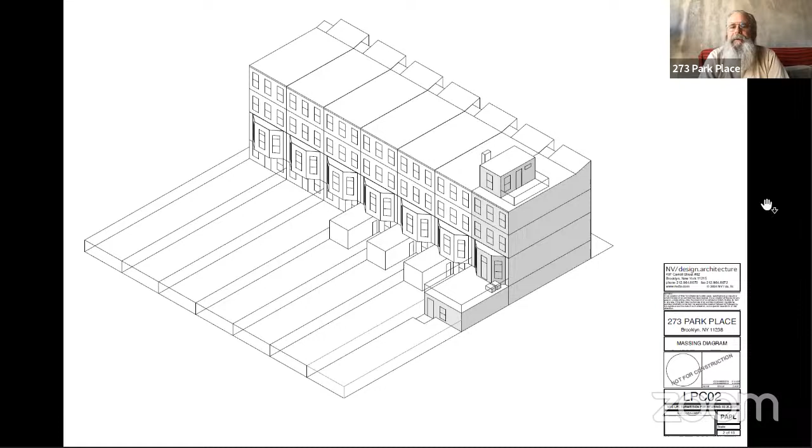Just as a general outline, what we're proposing is a penthouse addition to the roof that hugs the interior lot line. It's an exposed wall since this is the last house in the row, so we're setting that back from its side wall as well as the front and the back to limit its visibility. At the rear yard, we're proposing an extension of just the garden floor, the basement floor in this case, keeping it clear of the oriel, which we're essentially restoring, although we're adding a door to allow access to the terrace at the top of that extension.

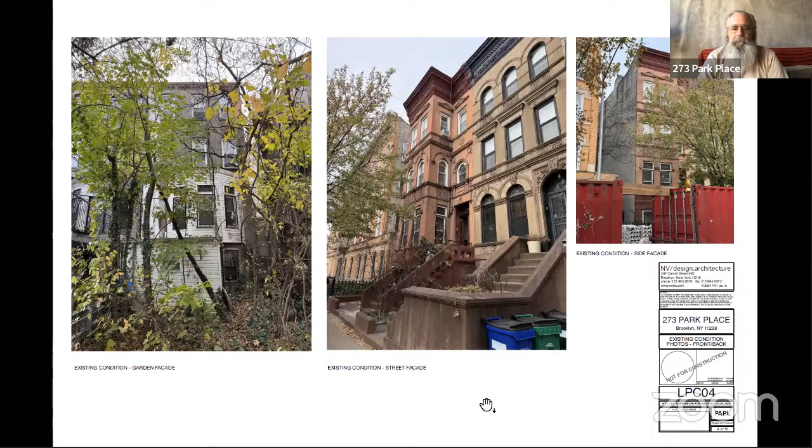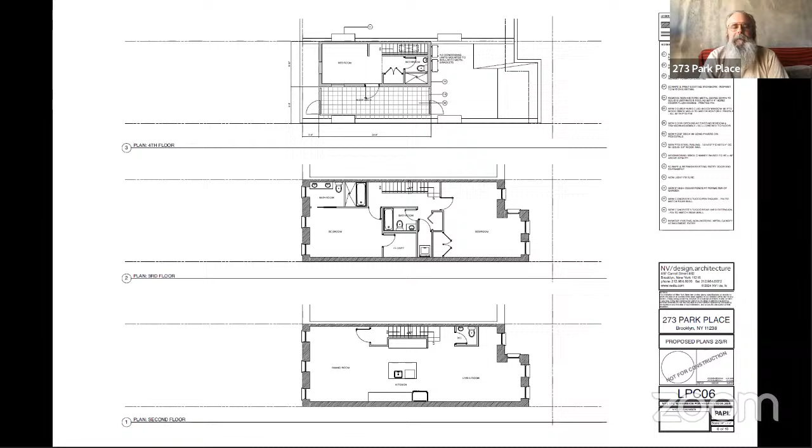Then above that is, I guess, a duplex plus penthouse, or a triplex. You can see it's set back from the rear, the front, and the side. We've sloped the roof, you'll see that in a moment, to keep it out of the penthouse, out of any sort of public view. There's the existing section.

The nearest neighbors that have a single story addition are down at the other end of the row, I believe at 289 and 291, or thereabouts—those are single story additions approximately 18'9" instead of the 23 feet we're proposing. They essentially line up with a series of additions further to their east that are 2- and 3-story additions. Our hope was that there would be some acknowledgement that we're pushing down our single story, and that we could get some additional depth to our addition, given that it's essentially just above the fence line instead of a full story at the garden.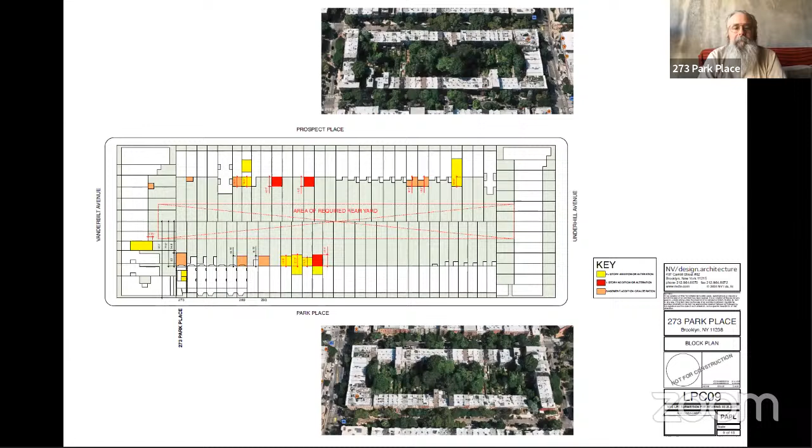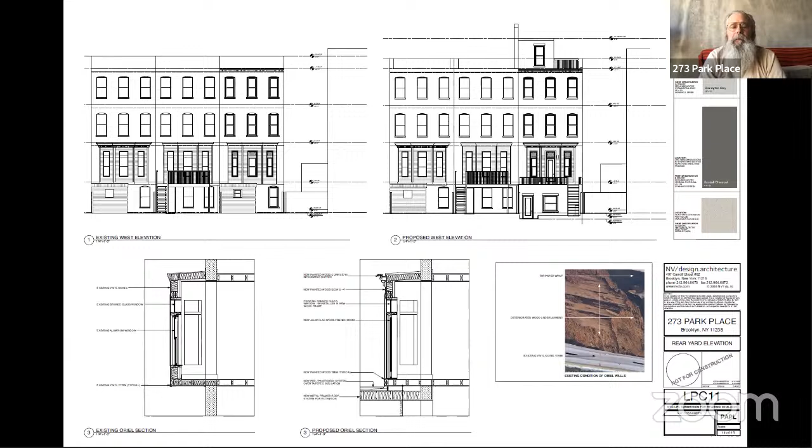So those are larger elevations of this situation. The back elevation of the extension has a very small parapet detail that conceals a few inches of the assembly that forms the pedestals and pavers on the roof of the extension, and then a stair down to the garden beyond.

Oh, sorry. And then up above, you can— oops. Well, it's deep. How do I go back? There we go. No.

Sorry. You can see here at the penthouse, it's very simple. We've centered the window between the windows below. That's obviously set back. It's all in a stucco system with a railing that essentially aligns to the chimney. We're extending the chimney to the left, which is also not visible. There are the sight lines and elevations of that side of the house.

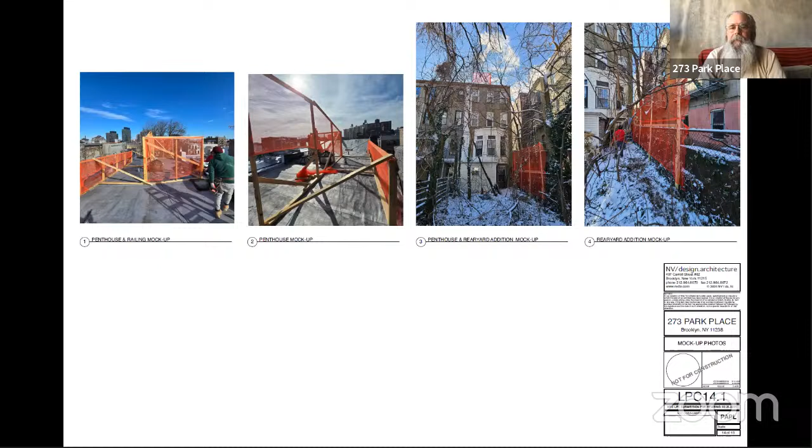These are our views with the mock-up in place. Nothing is visible, of course, on the house side of the street. And then at the bottom, there's a small gap between the house and the corner apartment building, very seasonally and minimally visible above the fence. There should be a little bit of the height of that extension visible.

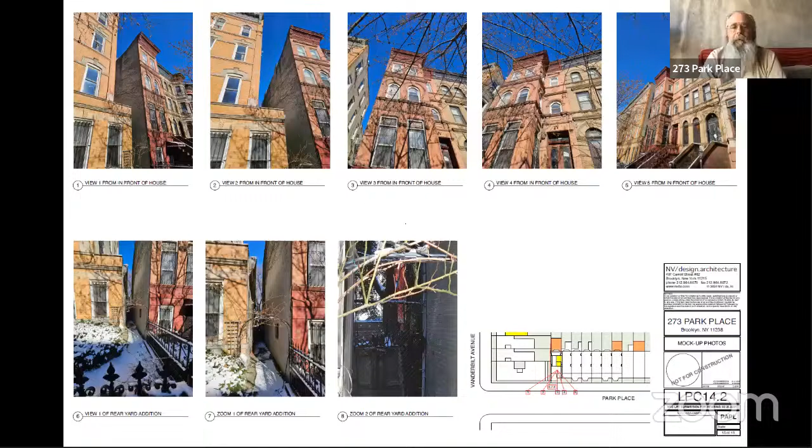From across the street, you don't see the penthouse itself from anywhere, but in this last slide, you see a sliver of the railing to the north of the chimney. If that's a problem, we believe we can reposition that railing to make it completely invisible.

And that's it. Thank you. All right, any questions, commissioners?

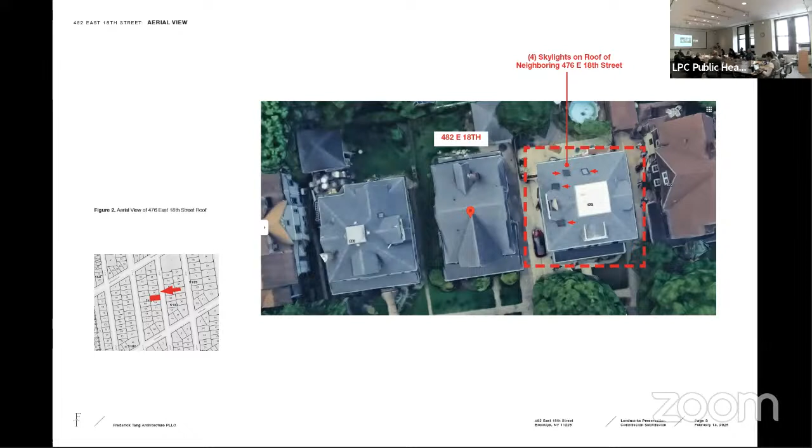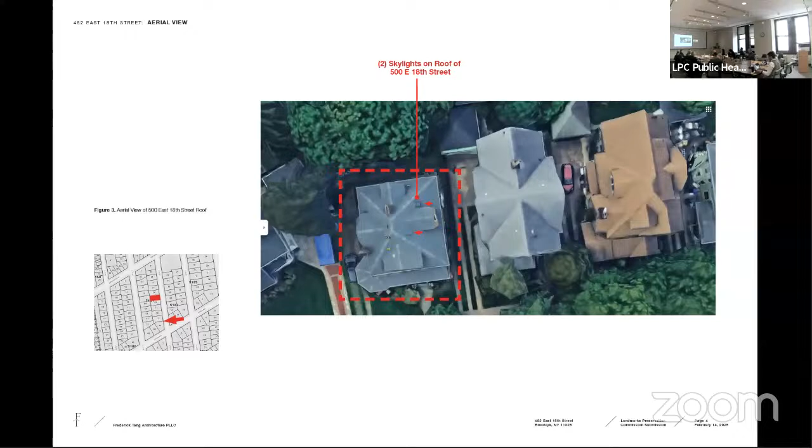Hello, my name is Frederick Tang. I'm the architect presenting this proposal for skylights. This project is in the Ditmas Park Historic District, at 482 East 18th Street. The next couple of slides show other homes along the street that have skylights. The house directly to the north at 476 East 18th has 4 skylights on the roof. Further down on 18th Street at 500 East 18th, this house has 2 skylights on the roof. The house at 554 East 18th Street also has 2 skylights on the roof.

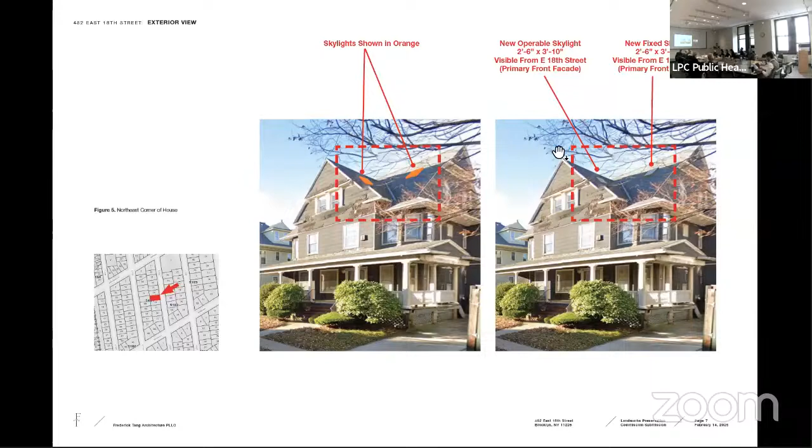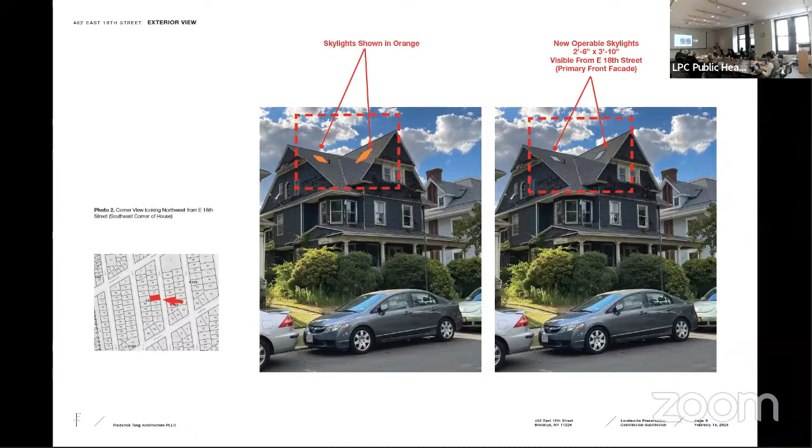Here's a view from the northeast corner of the house, skylights shown in orange, and then on the right a photorealistic rendering, with a close-up so you can understand the scale. Here's a view from the southeast, looking at the 2 visible from the southeast side, again in orange and photorealistically on the right, then zoomed in so you can understand the scale.

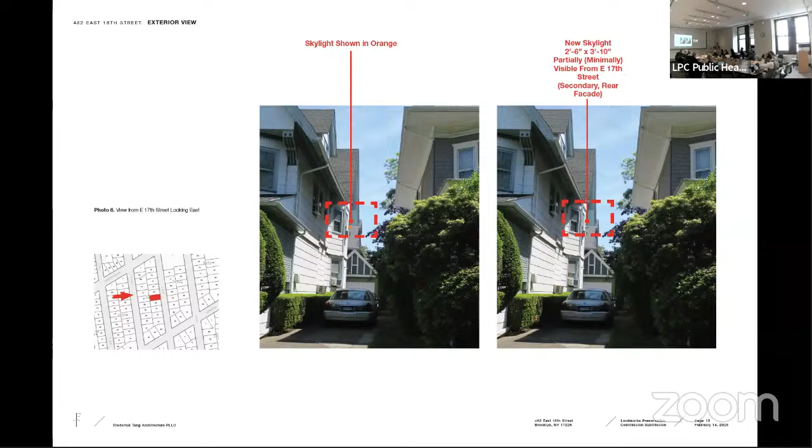We are proposing one on the very back of the house, which is visible through the driveway of the street just behind East 18th Street. This is shown in orange and photorealistically. And this is a view through the driveway at East 17th Street, where you can sort of see a glimmer of it just past the roof line of the house on East 17th, zoomed in here.

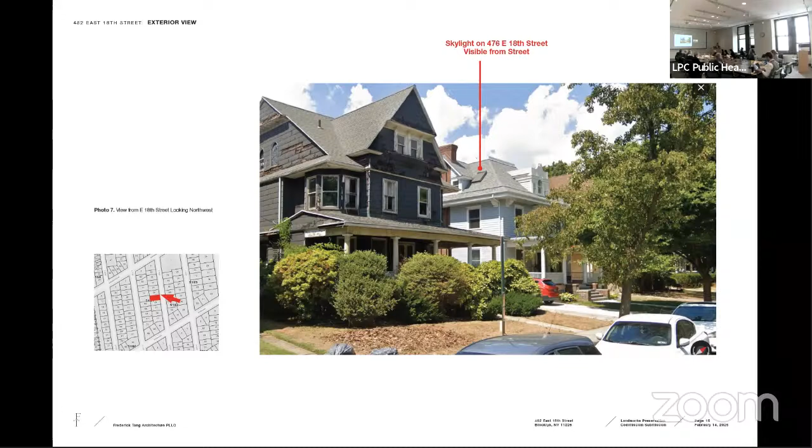Any questions, commissioners? I'll note that there is no one in the hearing room to testify, so I'll turn it to Stephen to see if we have any remote participants. Thank you, Chair Carroll. Anyone joining us via Zoom, please use the raise hand function. Lucy Levine, you will be next to speak.

Hi, Commissioners. My name is Lucy Levine. I'm speaking on behalf of the Historic Districts Council. HDC finds these skylights appropriate because they do not damage or remove any historic fabric. As a point of information, we were interested to know whether the skylights the applicant showed as precedents were approved by the Commission or installed prior to designation. Thank you.

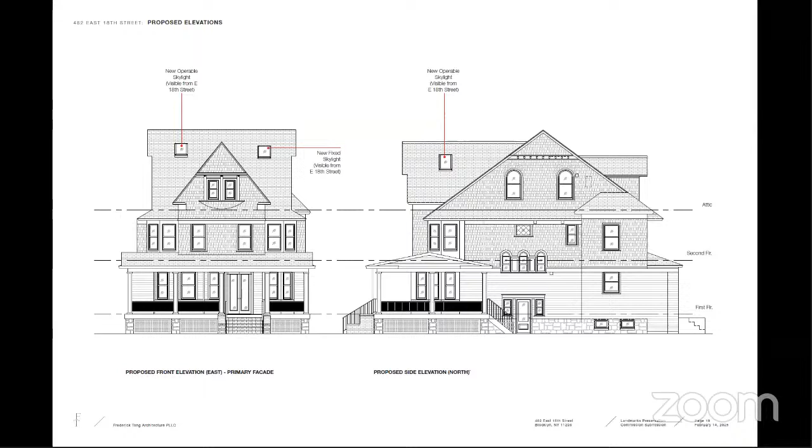I will note for the record that Brooklyn Community Board 14 holds a policy that they do not hold public hearings on LPC items unless requested to do so by the neighborhood association. In this case, the Ditmas Park Association determined that a hearing on the matter was unnecessary. Any final questions, commissioners?